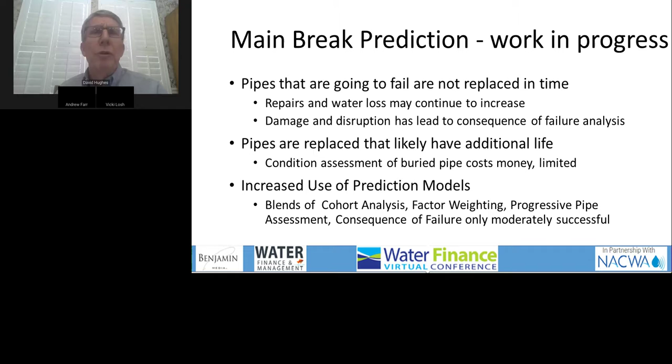There are also utilities that invest in a number of asset management techniques to directly look at the physical condition of the pipe. The risk of pipe failure includes an understanding of the consequence of failure, as well as the probability of failure, and aided by hydraulic modeling, they have been able to focus on consequence to reduce the more catastrophic types of failures.

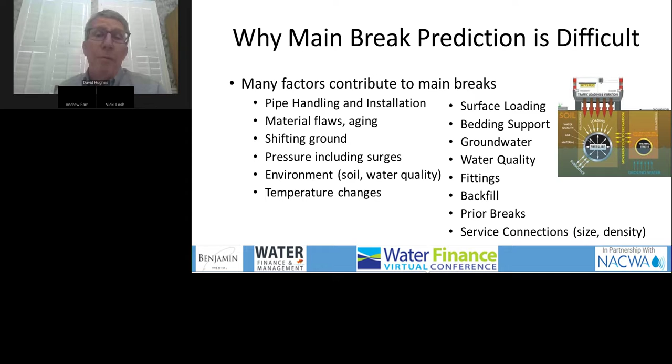These main break techniques have really not been totally successful, and some far from it, trying to determine what buried pipe will fail given the differences in the pipe characteristics, the pipe environment, how they were installed, and so forth. And then weighing these techniques in a proper fashion is really a very complex issue. So this is where machine learning comes in.

Machine learning has the ability to sift through virtually unlimited amounts of data and find elements associated with events like main breaks. The graphic in this slide, up there in that upper right-hand corner, illustrates an important concept that main breaks are not caused by a single combination of factors, but by multiple combinations of factors. These combinations can vary significantly. Understanding these combinations could also prove enlightening to operators down the road, but also consider the significant value of identifying pipes with a low likelihood of failure and those that are not going to fail in the very near future.

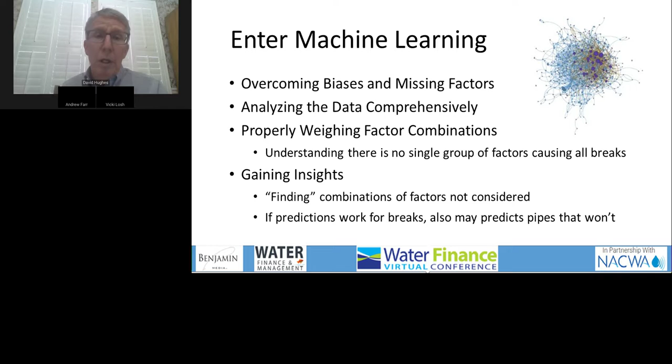So allow me to step back here and just briefly go through the machine learning process. This is basically the VODA approach, but it's really left to the utilities to look at the similarities and differences between, I guess there are 4 companies now that do this machine learning process. The first requirement, of course, is data, accurate data. The process then includes checking on that data to make sure that it's properly assembled and gives you good information on which the machine can base its decision making.

And then, of course, the algorithm itself that analyzes past breaks in order to predict what pipes are then likely to fail in the more immediate future. And then finally, there's an output component to this, where either graphically or in a tabular form, the information is provided to allow analysis and understanding which pipes are going to break first.

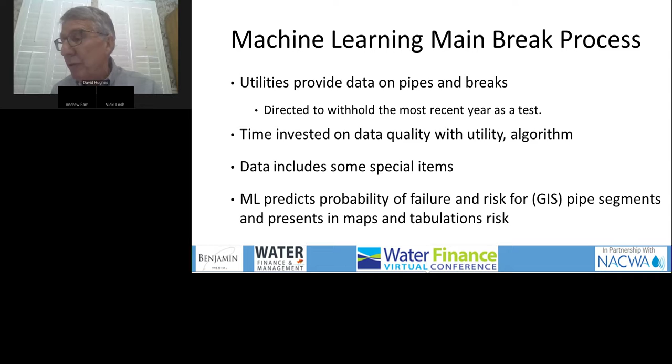So that first step, collecting data, I basically categorized 3 different types of data that are under study. There's utility data, a lot of it harbored in a GIS format, but also, and very key, is good leak or break history, usually in repairs that summarize the pipe types and so forth.

There's also regional public data, and this really varies quite widely. It's environment, it's looking at soils, and some of the machine learning companies actually use satellite data as an additional factor to try to get more precise with what's going on in the background.

There's also a third category called proprietary interaction variables, which is a vague way of saying, yeah, there's some things that over time machine learning companies have found seem to be contributing to some breaks and are looked at. And one actually that VODA has discovered is the slope of the pipe. For some reason, if the pipe is pitched more severely than level, there's some added likelihood of failure.

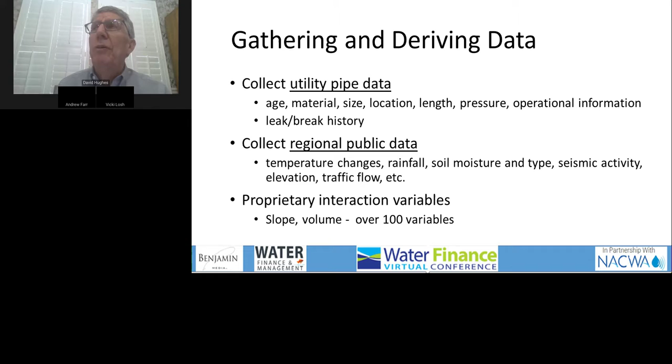And then comes the reviewing of the data. And in some of these cases, quite simply, the data isn't correct. Some of the vendors will use algorithms to try to spot the data errors in amongst all of the collected data. There are obviously some highly variable things. We all know that weather can play a role in the number of breaks that occur.

And one issue that I came across was one of timing, and the example there is the use of operating valves and hydrants. And you need to know when that takes place. If it takes place before the actual break, then it can be a contributing factor. If it happens afterwards, it's probably just part of the repair process.

And then we go to the presentation of the data. As the data is generated, and I'll show some illustrations here of how that's done, the key thing here is that we're not looking just at the probability of failure, but we're also looking at the consequence of failure and then the risk.

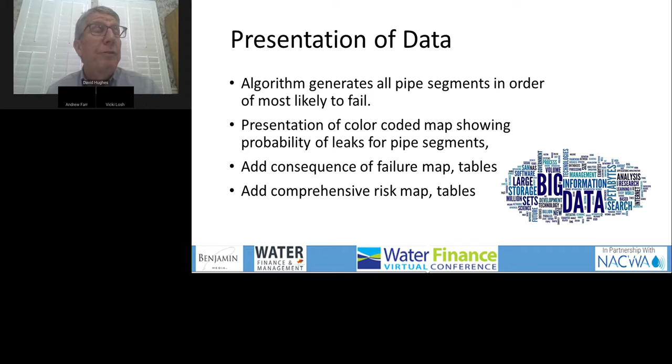Here's an example of a graphic and tabular display, and I know you can't really read the results there on the left-hand side, but it's basically a ranking of the top 3% of pipes in order of probability of failure, from highest to low. And it's shown there graphically, so you can obviously see if there are concentrations of piping that have a high

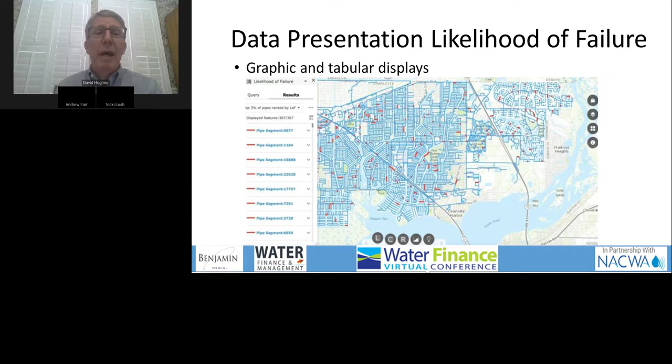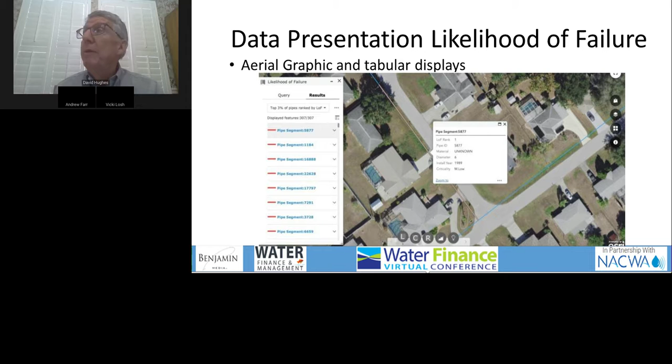likelihood of failure. You can also, in most of these softwares, zoom in, use Google Maps or some equivalent in order to see up close what a particular pipe is, and maybe even get an idea of the consequence of failure. And that's what this is. The consequence of failure can actually be derived by the utility using some other independent software, or they can work with the vendor to actually evaluate what pipes have the most consequence of failing.

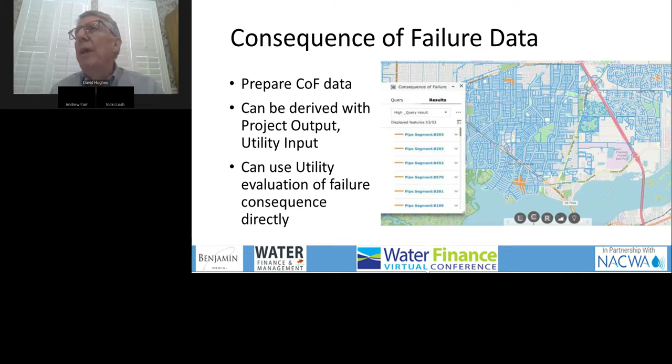A lot of these pipes don't really have a severe consequence, but utility people are probably familiar with those that have high consequence, the ones under roads or in creeks, or large pipes that are prone to cause major flooding or other types of damage, and so forth. And this is all combined to give you a risk of failure.

And again, taking the consequence and factoring in the probability gives you a good sense of which pipes might get the guy in the utility fired if they break, and they can actually concentrate and focus on these particular pipes in terms of either replacement or even mitigation.

It's clear that not all of these pipes can be replaced immediately, but certainly the operators can go out and make sure that valves nearby are operating properly, that they're doing their very best to anticipate breaks that seem likely to take place.

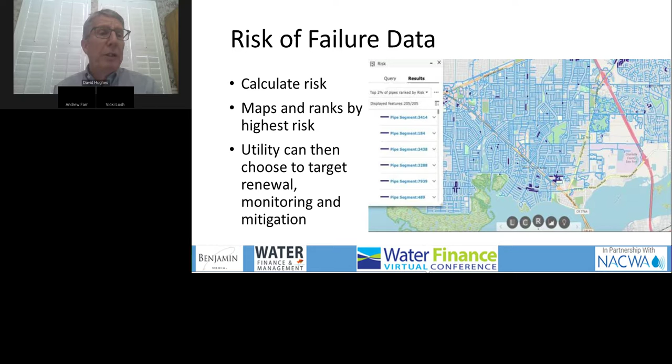So now let me jump back and let's talk economics. And I wanted to focus on this in two ways. It has to do with the fact that the utility, without the machine learning, may pick the wrong pipe to replace, thinking it's likely to break, but it doesn't, and actually might last for many more years without failing.

And on the other hand, the machine learning might help you pick the right pipe, the pipe that's about to break. So I want to do the analysis essentially looking at what happens if the machine learning aids the utility in picking the right pipe as opposed to the wrong pipe.

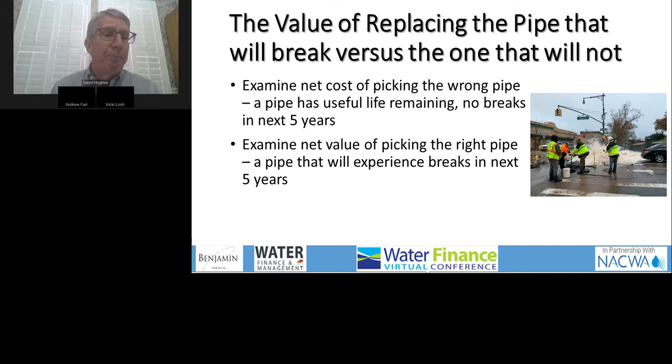So I basically arbitrarily picked a utility with 250 miles of pipe. This could also be a study area. It doesn't have to be the whole system, but that's a pretty nominal area. They have about 75 main breaks a year in those 250 miles. And this particular utility is doing a fairly decent job of replacing pipe annually.

But roughly 3/4 of the pipes that they're replacing are actually done for the specific issue of main breaks as opposed to other things like water quality or hydraulic considerations, which are also good reasons for pipe replacement.

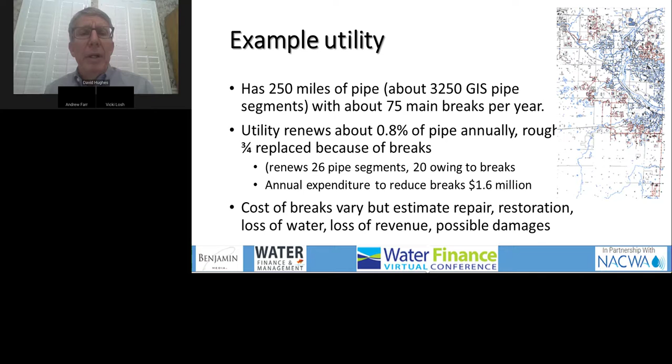But boiling it down, we're looking essentially at 20 decisions of pipes to replace, at a cost of $1.6 million. The costs of repairs, as you know, vary, but we'll assume an average here as this discussion goes forward. So what happens when we pick the wrong pipe?

Well, if you pick the wrong pipe, not much actually happens other than you've spent money, and we've calculated that at $80,000 for a 400-foot pipe segment. And we've missed an opportunity to actually replace a pipe that will break. So if we had actually paid attention to machine learning and not made that replacement, we would have at least delayed the outlay of cash to replace this pipe by 5 years.

And I basically took an interest rate calculation of not spending that $80,000 for 5 years, and owing to all the conditions that are going on with interest rates and the pandemic and so forth, I'm actually going to provide you a range, if you will, showing a wide variety of interest.

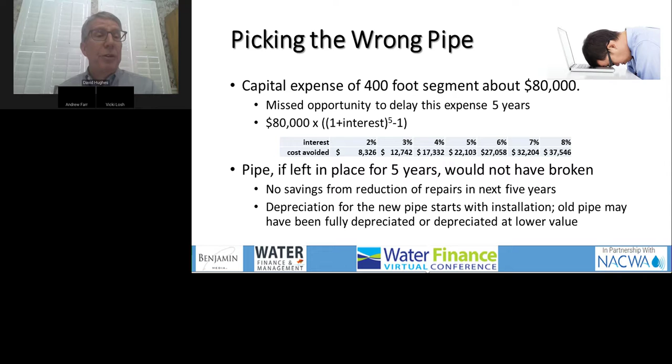So if the pipe is left in place for 5 years and doesn't break, you're actually in better shape than if you had replaced it, because now you've got a pipe in the ground that's already depreciated 5 years without any real changes. So what happens if you pick the right pipe?

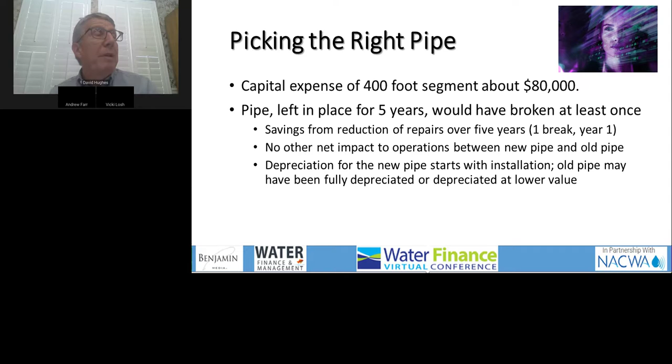Well, picking the right pipe, at least you know you're going to have one main break that you've been able to avoid, and presumably the very next year is when this pipe is going to fail. So the focus here is on the money that you've avoided paying out in terms of the repair.

So here's a real quick calculation of picking the right pipe. It comes up to about $4,500, but I basically rounded it up to $5,000 for a very simple reason, and that is that we're also looking in most of these cases at the risk of failure. And so it's most likely that the third-party damages or the repairs or maybe the loss of water, some factor is actually higher than maybe your typical. So allow me to round up here to a $5,000 figure that we would avoid if we use the machine learning.

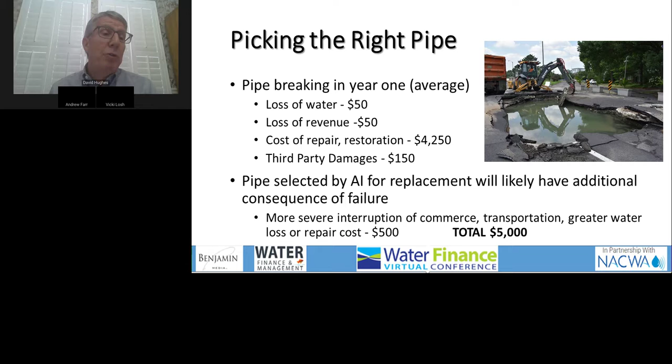So putting this all together and remembering that the utility is replacing about 25, 26 pipe segments and 20 for breaks, we're also looking at 75 breaks per year. So picking one of these at least eliminates one break per year. And of course, then there's the financial consideration of picking the wrong pipe, which varies with those variable interest rates between 8,000 and 38,000 roughly for the unnecessary immediate investment that you've made in replacing a pipe that really didn't have to be replaced. And picking the right pipe in its place, it saved you $5,000 right off the top.

And there's obviously some potential for that pipe to break again in another, say, 5-year time frame that I'm looking at. But just assuming one break, the totals run at least $13,000, up to $42,000 if you take the high end of my interest rates. So now you're probably wondering, well, how do you know that the machine learning is going to do that much better than the conventional way of looking at pipes?

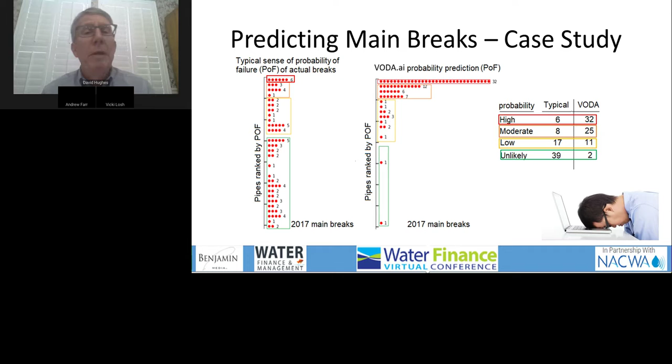VODA's probability prediction, on the other hand, actually categorized almost half of these as the highest ranked pipes in terms of likely to fail. So we may be looking not just at maybe one right pipe over a wrong pipe, but multiple decisions that are made correctly. And so now the question is, in this particular example, how many might we assume that would be? It's a good question, but the estimate that we came up with was picking maybe 10 pipes, at least 6 pipes seems to be a realistic number.

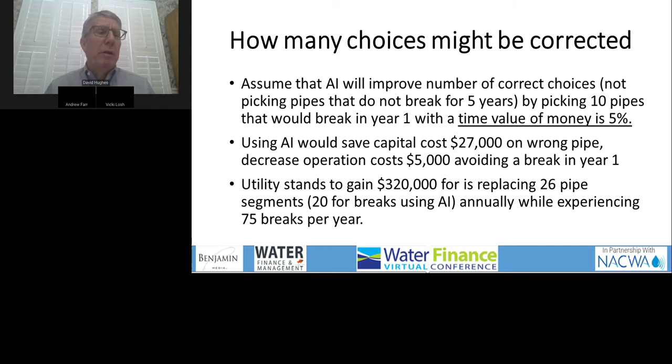And I've also included in this calculation, I've actually set an economic level at 5%, sort of the mid-range of those interest rates that I gave you, just to give you a little bit of feedback. And if it involved 10 pipes, we're talking here a net of $320,000 of value in making these decisions. Even if it was half of that, it'd be $160,000, which is well in excess of what the machine learning company would charge you for this exercise.

And I would be remiss if I didn't talk about some of the hidden values of this process. First of all, we've talked about data cleansing, that the GIS data would be upgraded and presumably upgraded for other applications that the utility would have. I've only talked really about the savings addressed in year one. There could be some additional savings going forward in continuing the process, as well as identifying pipes that might break more than once in that 5-year time frame that I was looking at. The focus on consequence of failure, if that's not been employed in the past, might also increase the savings by avoiding some of the major damages.

And obviously there's a potential, as I mentioned, to mitigate damage by being better prepared for pipes that you know have a high likelihood of failure that are not replaced. But AI does continue to learn and does improve performance over time. That's one of the good parts about this, is that even if it got something wrong in that first year, the machine learns. It gets smarter as time goes on. And then finally, as an engineer, I appreciate the fact that I can look and say, well, why were these particular pipes selected for breaking? And it might improve my knowledge, eliminate some of my biases as to why pipes break.

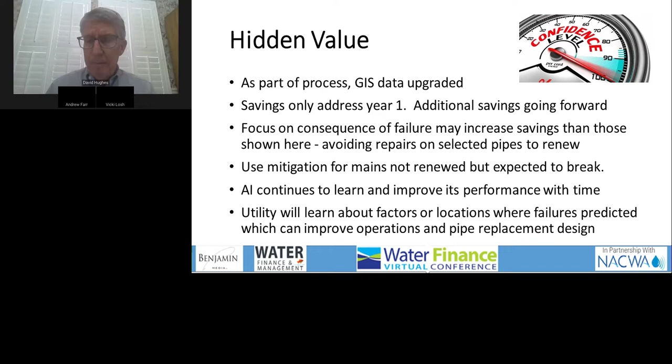So in conclusion, machine learning, and there are examples, and the good news is that utilities can go out and do this themselves. They can hire the machine learning vendor and have them do a trial. And the way this is set up is that you don't tell the company what pipes have broken in the most recent year, and you give them the previous year's histories, and they try to project and predict what pipes have broken in the most recent year, just to validate the process.

And then finally, at the end here, we have that again, that appreciation for making the right choices and being more confident in making those. And with that, Andrew, I think I'm done and have some time for questions.

Yeah, absolutely, Dave. Great presentation. Thanks very much.

Yeah, a couple questions. I think maybe it might help us to recap a couple of points. I'm going to go back to the title that we came up with for your presentation, essentially machine learning, data intelligence, and the impact on capital planning decisions. A lot of our audience members on with us throughout this conference are folks involved in financial planning for utilities, CFOs, people in those types of categories.

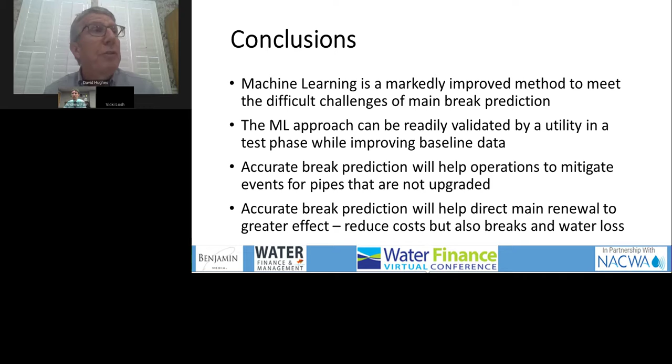So we've got to make really good choices, and that's why that consequence of failure component is important to at least minimize the damage. It's important from this machine learning perspective to actually be able to predict which mains are going to break, so that even if you can't replace all of those pipes, you might be able to valve them down, or at least know that the valves aren't buried under a recent paving project. And you can also be smart going forward, because if you know what's causing these breaks, the pipes that you're installing today can be designed to overcome whatever those issues are.

Yeah, final question, Dave. I want to ask you about machine learning. Obviously, it's been something that we've talked about a little bit so far. I'm wondering... Can you hear me? Yeah, Dave, I've got you. Can you hear me? Sorry, I've lost transmission. Can you hear me okay, Dave? I can still hear you.